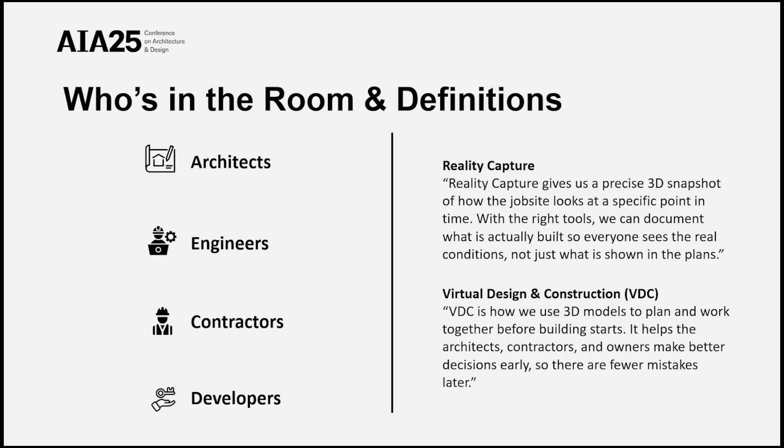VDC, or Virtual Design and Construction, is how we use 3D models to get teams aligned before anyone pours concrete. It's how we bring the model to life as a collaborative space, not just a drawing on the screen. It helps architects, owners, and contractors make decisions early and be proactive in how we build.

I'd like to give you a quick snapshot of who I am and why I'm so passionate about this work. I've always been drawn to that space where the digital world meets the physical one, with a love for architecture and engineering, which I studied at Lawrence Technological University in Southfield, Michigan. I also picked up a couple math and computer science minors on the way because I was interested in how things work behind the scenes.

Later, I joined NavVis, where I got to see the job site from a different perspective, from the vendor side. That's where I realized how powerful this data can be in the hands of the people that actually do the work every day. Moving from Detroit to Dallas, I joined Rogers O'Brien Construction, where I'm leading the reality capture team so we can coordinate better from day one.

I'm also working on my MBA at SMU because I believe that building better starts with leadership, communication, and strategy. In this past year alone, I've walked 34 miles scanning with the NavVis VLX. That's like coming from here, from the convention center, walking to Harvard, and back again.

Everything I'll show you today comes from that intersection, between the job site and the digital world, between the work we do today and the people it impacts tomorrow.

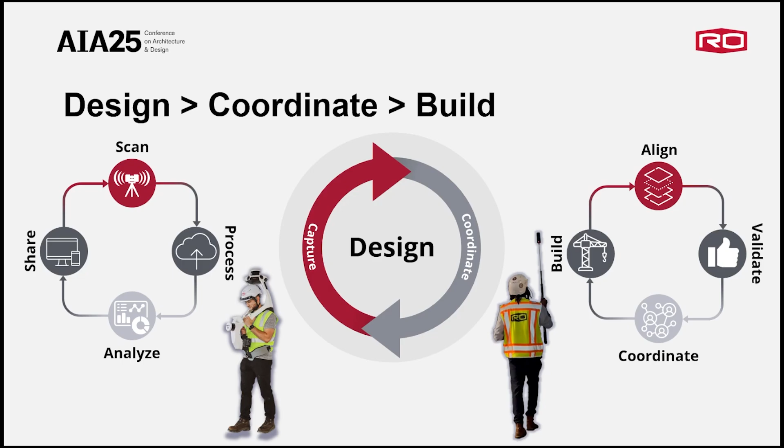Design, coordinate, build. Sounds linear, but it's not. It's a loop. Scan, analyze, share, align, validate, repeat. This is the framework that grounds everything we do. It's not just a sequence of steps, it's a loop, a living, breathing process where every phase feeds the next. We start with design, but it doesn't stop there. Design decisions inform coordination, coordination guides how we build, and how we build feeds right back into design.

On the left, you see what we call the capture cycle. This gives us the truth. It shows us how the data is processed and what's actually on the job site. On the right, we have the coordination cycle. This is where design intent meets the field reality. It's how we validate decisions before they become problems. We align models, coordinate with trades, and give field teams confidence before anything goes vertical.

This whole cycle is collaborative by nature. Everyone's looking at the same information in the same model in real time. And when it works, when it's firing on all cylinders, design doesn't just drive construction. Construction actually helps drive better design.

Let's be honest, construction is tough. 45% of construction professionals say they don't spend time on optimal activities. Why is that? They're chasing down paper drawings, lost RFIs, figuring out what has changed again. That's not just frustrating, it's expensive. Think about it. You walk the job site only to realize the drawings you're referencing are out of date. You spend 20 minutes chasing down a foreman, or worse, you're reworking something because it wasn't caught in coordination.

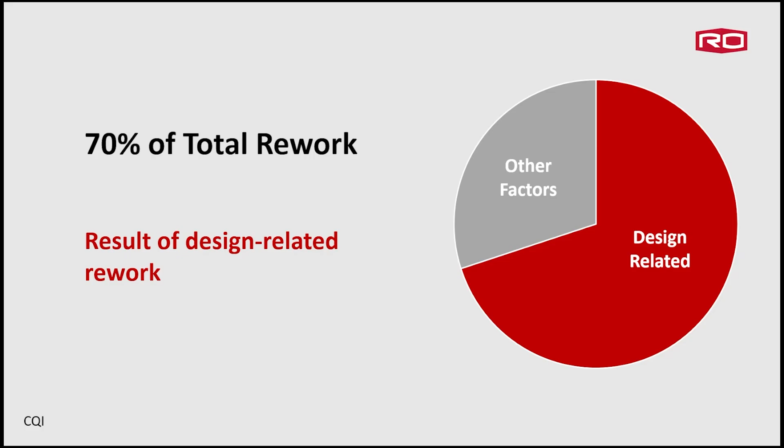And then we look at rework. 70% of rework comes from design-related changes. We don't mess up in the field because we're sloppy. We mess up because what's in our heads doesn't match what's on the screen or what's in the dirt. That's drawings that don't match conditions, models that never made it to the field, coordination that fell short.

Here's what that really means. It's not that people are building it wrong. We're not setting them up to build it right. And the cost is massive, not just in dollars, but in trust, in time, and in team morale. That feeling when a crew has to rip out something they just installed, it sticks with them. But the good news, this is fixable. Because if design is the source of rework, then design is also where the solution starts.

That's why coordination, real coordination, early and often, isn't a luxury. It's like a lever. If you pull it right, you don't just save rework, you save relationships. And the result? 72% of projects finish behind schedule. Let's sit with that number for a second.

72% of projects don't finish on time. When we don't align early, we scramble later. When we can't see what's coming, we fall behind.

Now think about what that means for the people on the ground. It's not just a delay, it's overtime, late equipment rentals, weather windows gone. It's that Friday we were planning to pour concrete, slipping into next month.

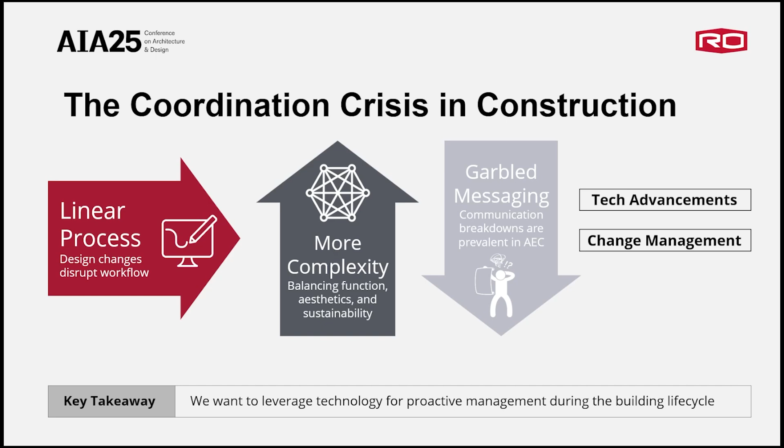So here's the key takeaway. It's not just about using flashy tech. It's about using it to create proactive workflows that adapt as fast as our projects change. That's the shift, and now I want to show you what that looks like in action.

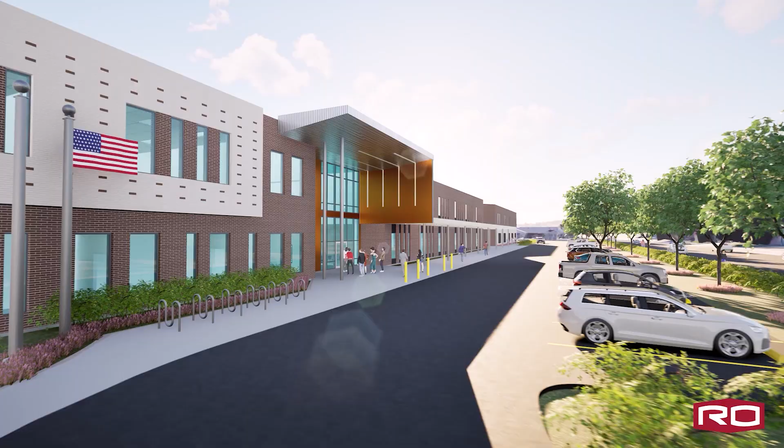This is Briargate Elementary Rebuild. A real project, real people, using real tools. It's a new school for a growing district just outside Houston. The owner in this project was the Fort Bend Independent School District, and the architect was Kirksey.

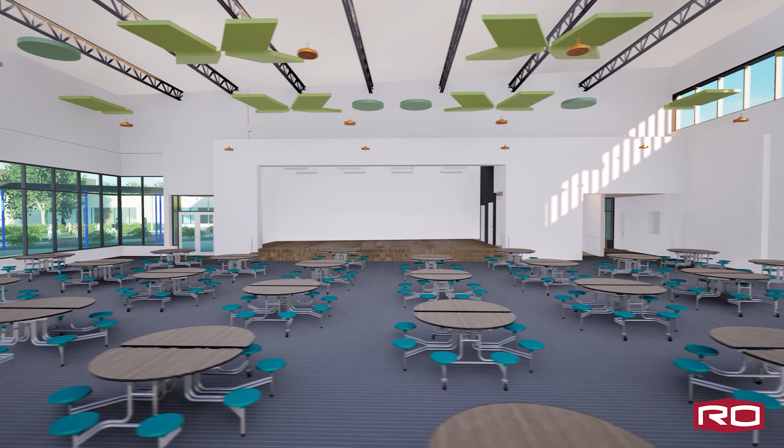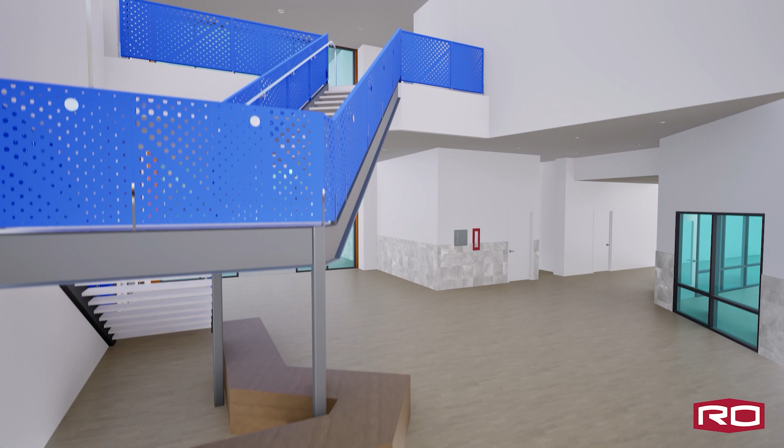It's a school for about 1,000 students, a one-story section for multi-use educational rooms, early education and assembly spaces, and also a two-story admin and elementary school wing. The structure is actually separated by a wall to create two separate structures that function as one building, totaling 129,000 square feet.

So I want you to imagine this happened. A little girl is walking past the finished school. She looks up and says, I'm going to build one of these one day. But in order to build this type of inspiration, we need a strong team behind the project.

And I want to take a moment to introduce this wonderful team. Operations and VDC working side by side, not in silos, but in sync. On the operations side, we have Esmeralda, our quality manager. She brings a sharp eye and a deep commitment to doing things right the first time. Artemio, our superintendent, was a heartbeat of the field, and Antonio, the project engineer, was the connector.

Then there's the VDC team. Eloisa served as the VDC lead. She made sure everyone had what they needed before they needed it. Jesse helped bring the project to life visually, handling everything from walkthroughs to renderings, and I had the privilege of supporting the reality capture.

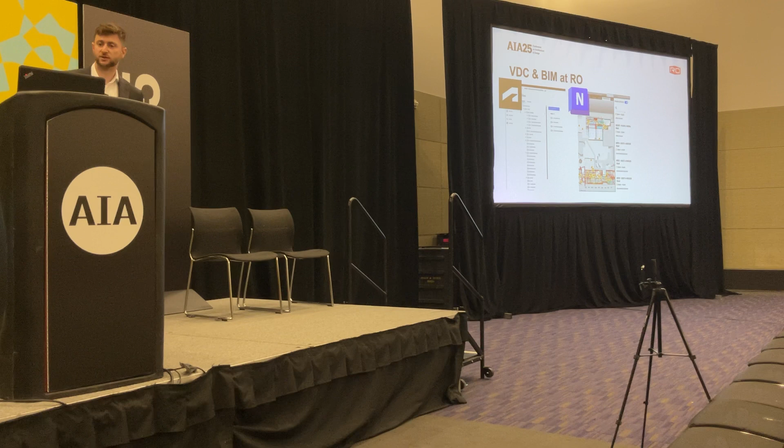Then we use Navisworks to manage coordination. This is where we clash models, track issues, and assign them out. Essentially the war room where all the puzzle pieces come together.

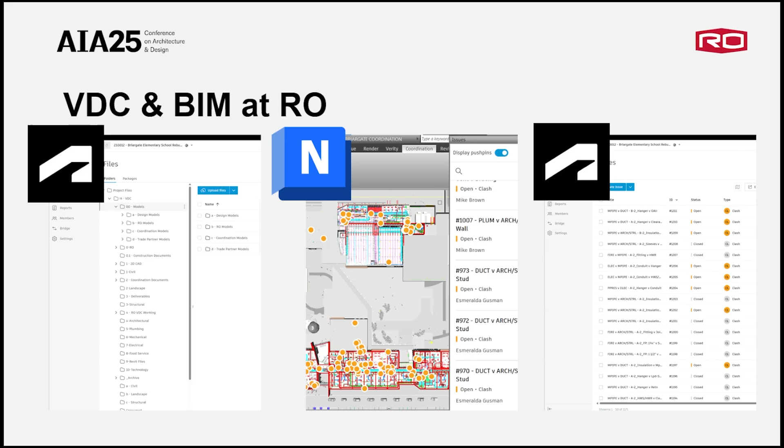And finally, by tracking those coordinations directly in ACC, we're able to create a cloud-based feedback loop. That meant the architect, the engineer, and the subcontractor could all see the same issue with context at the same time, and they could resolve it in real time without waiting for the next meeting. These tools didn't just support VDC, they made it visible, made it manageable, and made it a shared responsibility, not just a siloed role.

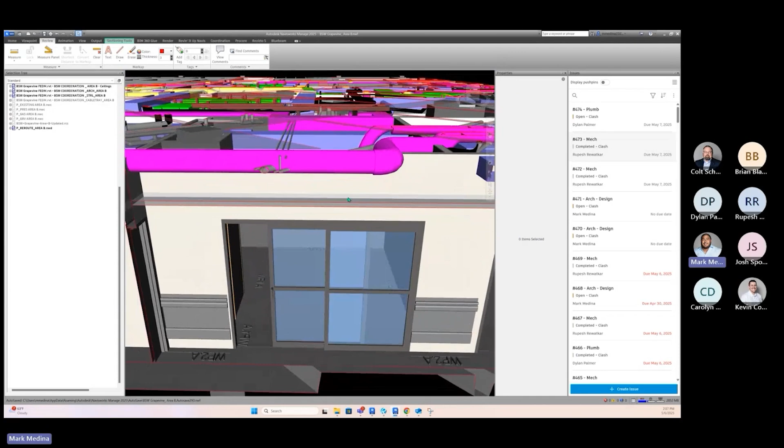Here is coordination in action. Mark Medina, a VDC engineer, flying through the model, sketching ideas, guiding trades, solving problems live. This is what it looks like when coordination is a conversation and not a chore.

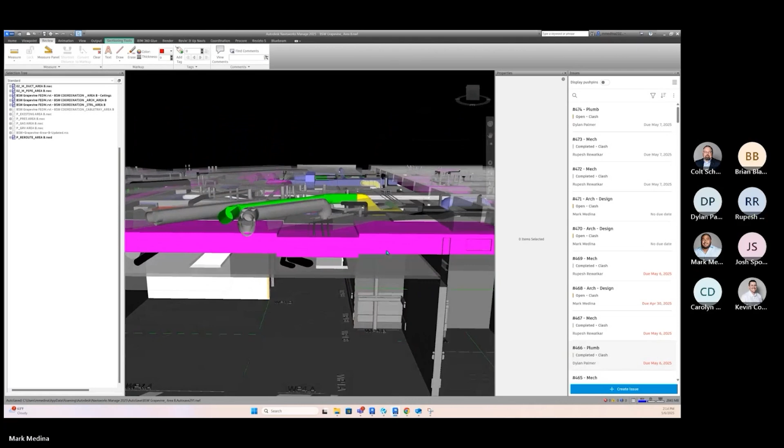We're not putting up paper anymore. There's no more waiting for emails. Every trade is in that meeting. Everyone sees the issue, the context, the fix, all at the same time.

And the best part, with one click, everything we just talked about is turned into a tracked issue with an assigned owner, a deadline, and a snapshot of the model view. This is how we turn a messy process into momentum. We don't just coordinate, we build trust in real time.

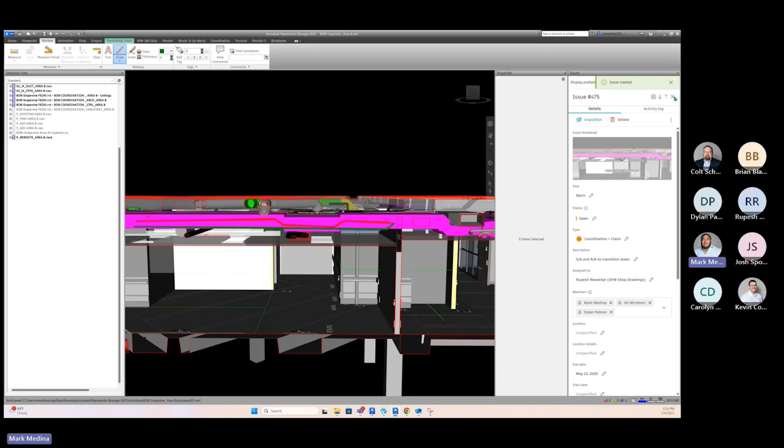What you can see here, Mark is trying to navigate a tight ceiling space. He would have had a lot more help if we were able to laser scan this ahead of time, so that we were able to give the point cloud to the model, to the architect. They could drop the ceiling a little bit lower instead of having to navigate tight spaces like this.

90 models managed, 1,234 coordination issues, 133,000 square feet coordinated in 146 days. If we break that down, we're clashing through nearly 1,000 square feet per day.

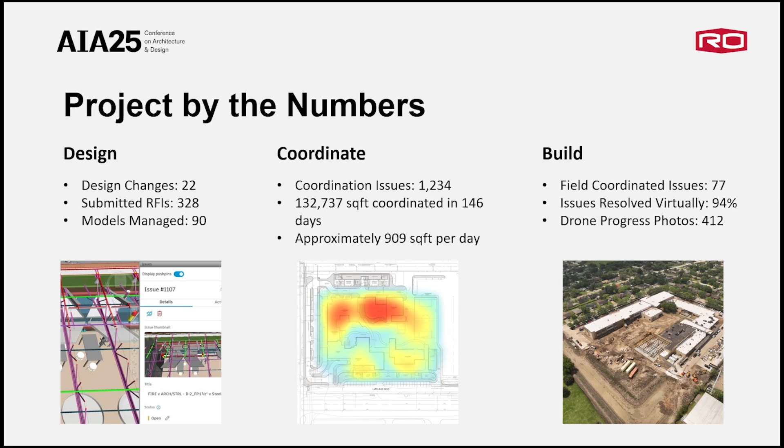And when it came time to build, we continued that pace. We tracked 77 field issues, but here's a number I'm most proud of: 94% of those issues were solved virtually before they became a problem in the field.

We also had 412 drone photos. They're not just pretty pictures, this is consistent visual intelligence. Why? Because the goal isn't just documentation, it's consistency.

And with consistency comes predictability. And with predictability, we open the door to automation, to smarter forecasting, to proactive project management. This is how we move from guessing to knowing, from managing chaos to managing outcomes.

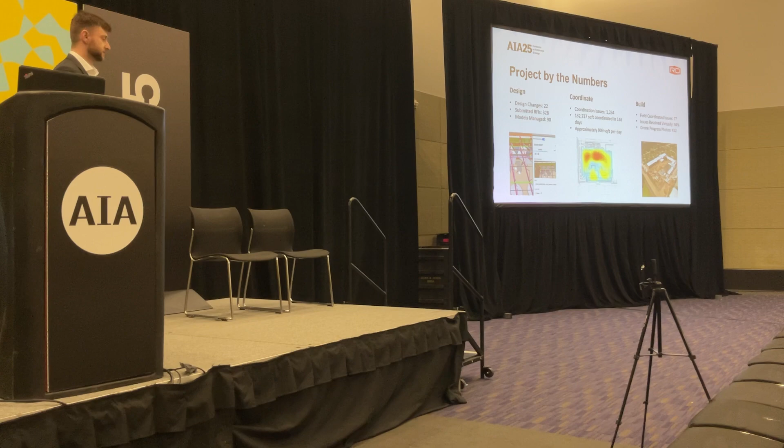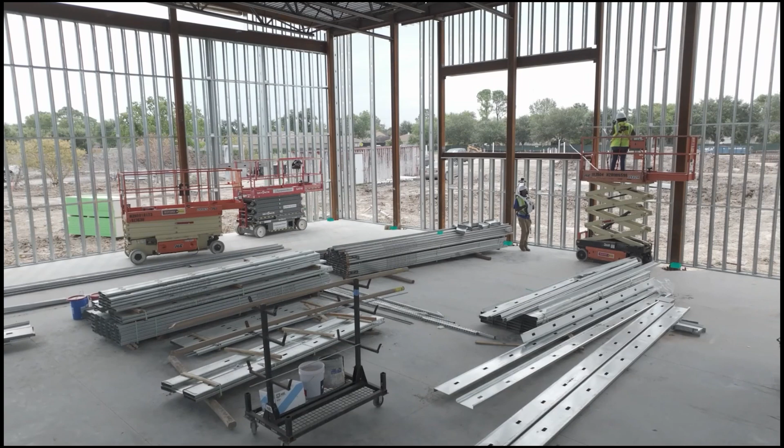By aligning these elements, we're not just visualizing the space, we're validating it. We can walk the job virtually and know if we're off before it costs us days or dollars in the field.

This is where collaboration can become clarity. When we see the same thing, we solve the same problem together.

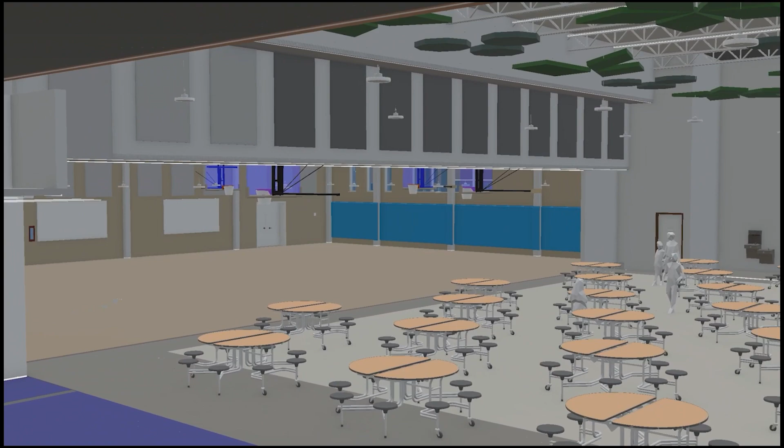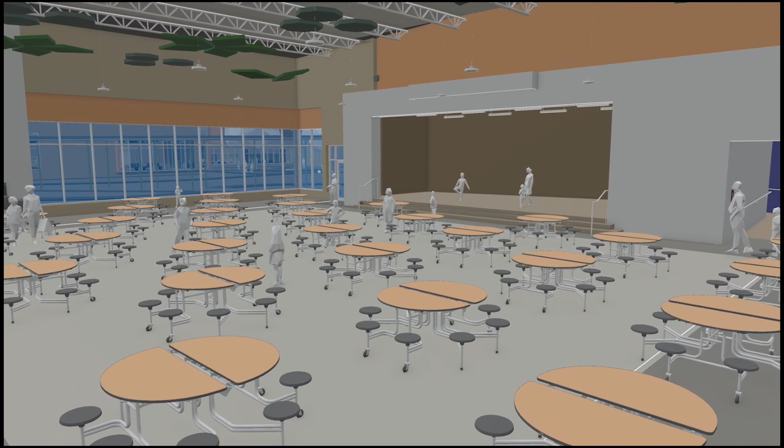The purpose of this laser scan was to validate structure the way it was installed. We were able to verify and prove that every third joist was actually installed inverted, and that caused problems during coordination because we had to navigate the duct around gaps that were not there.

Here's an exciting day on the project, when we brought the building to life before it was built. Jesse came to the job site and set up a VR experience right in the trailer. We had the owners walk through the cafeteria, through the classrooms, even go through a mechanical room, all in full scale. What you're seeing here is not tech for tech's sake.

It's about engagement, about confidence, about giving owners and stakeholders something more than just 2D plans or even renderings. It's about helping them feel it. Here is what we call the RO ride. Not just delivering a building, but delivering an experience.

You don't have to take it from me, listen to the field team. It was hard to stay ahead. We're using every tool we can. We're trying to find issues earlier. Whether it's trying to stay ahead of changes, relying on manual tools, or struggling to make use of expensive tech, our people are trying. They care. But they need systems that actually support them. And that's what this is all about: giving our teams the visibility, the speed, and the support without burning out.

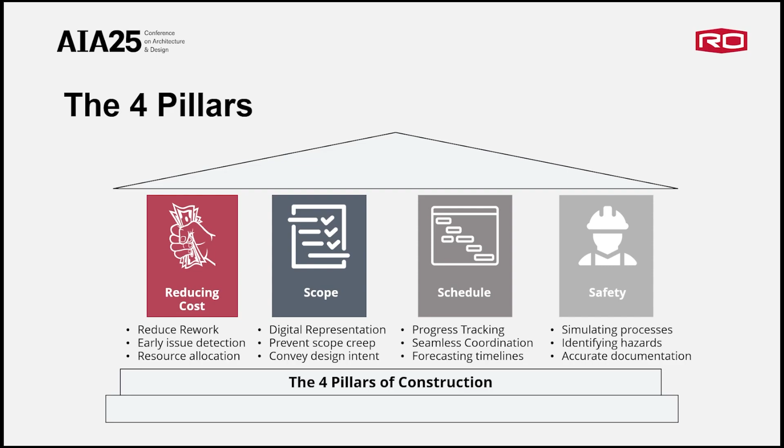Everything we talked about ladders up to this: reducing cost, clarifying scope, sticking to schedule, and staying safe. Cost, scope, schedule, safety - these are the four pillars every successful project balances. They're not new, but how we protect them is changing. Reality capture, model coordination, virtual walkthroughs - they're strategic shields against rework, delays, and confusion.

We reduce costs by catching issues before they hit the job site. We protect scope by visually aligning on design intent. We stay on schedule with real-time collaboration and proactive coordination. And we improve safety by simulating conditions before anyone steps on site.

So here's my challenge for everyone: pick one of these pillars, just one, and ask yourself, what is one process that I can digitize or clarify on my next project to strengthen it? Because the future of construction isn't just about building better buildings, it's about better building. And that starts with us.

Let's zoom out for a moment and talk about what the future will look like. This is a snapshot from MIT's Senseable City Lab. I heard a talk that I'll never forget. It said that the real-time city is real. Let's think about that: as sensors, cameras, and AI blanket urban space, our cities aren't static anymore. They're alive, they're responsive, they're storytellers.

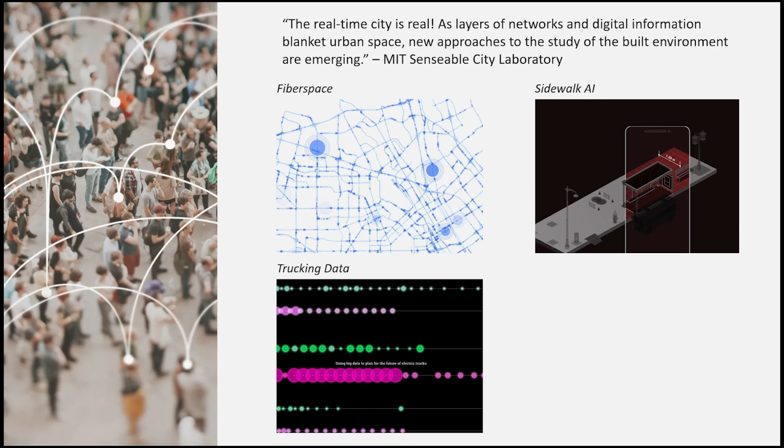Take a look at these projects. These are live stories being told by fiber optic cables sensing vibration, smartphones scanning sidewalks, algorithms tracking trucking routes or energy flows. They're turning data into texture, into insight, into design.

And that's what excites me. Because if we can visualize real-time city life, if we can design with data as a material, then we can build smarter, more responsive places. We can make decisions that reflect how people actually move through a space, what they really need, and we can do it in a way that's beautiful. This is where I want to connect with you, the imaginative minds in the room. Because if data is our new raw material, then you are the ones who can turn it into something meaningful.

So we've talked about the problems, we've shown you the tools, and we walked through the process. Now let's bring you in. Because here's the truth: architecture isn't just about math or models. It's about those visceral, emotional connections we feel in the spaces that we occupy. So my ask is this: who's feeling brave? I'd love to invite someone to come up and throw on this headset that I have behind me and walk through the school of the future.